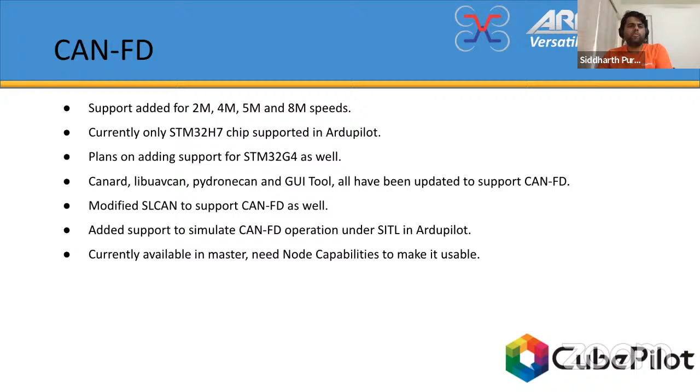So BRS basically means bitrate switching, which allows CAN-FD frames to be transmitted with two bit rates. So basically your arbitration phase will be transmitted at say 1 megabit, and the data phase can be transmitted at 8 megabit.

So what that allows is for nodes, and there are actually some chips in the market as well that are not able to do CAN FD frames, but are capable of understanding that it is a CAN FD frame and generate a blank data phase, so that the normal CAN node doesn't go into an error state. So this basically allows for a very nice movement from CAN to CAN FD.

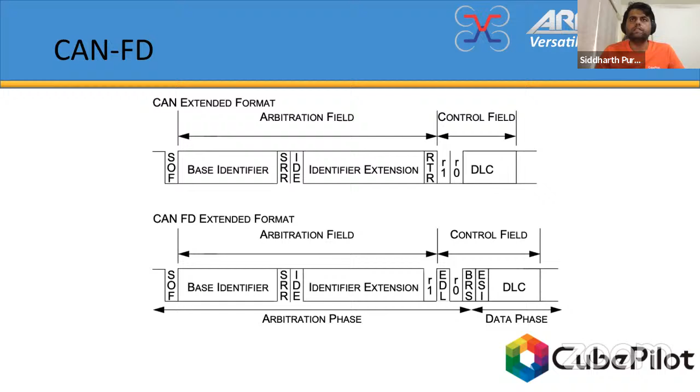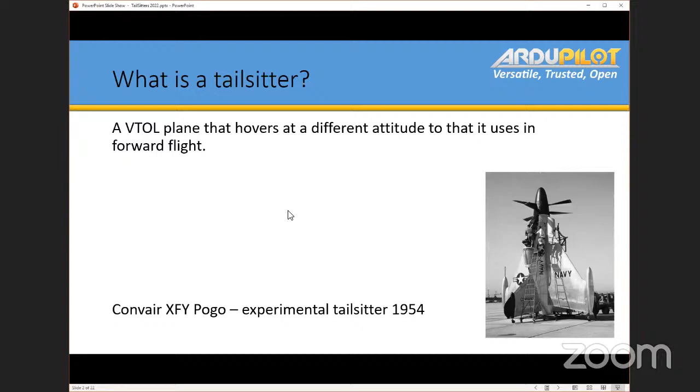Of course, we do also support single motor. So this will be like a 3D aircraft. So you can prop hang. ArduPilot can also prop hang with 3D aircraft. You need massive control surfaces because the control surfaces are your only form of control here. So you've got roll, pitch, and yaw just from control surfaces on these aircraft.

And we've got vectored tail sitters. So you don't need the massive control surfaces anymore because you generate your pitch and yaw forces by vectoring the motors. And of course, roll is still by differential thrust. And then we support these so-called copter tail sitters. That's basically a copter with a wing. So we get roll, pitch, and yaw from differential thrust and differential torque, just like a copter would.

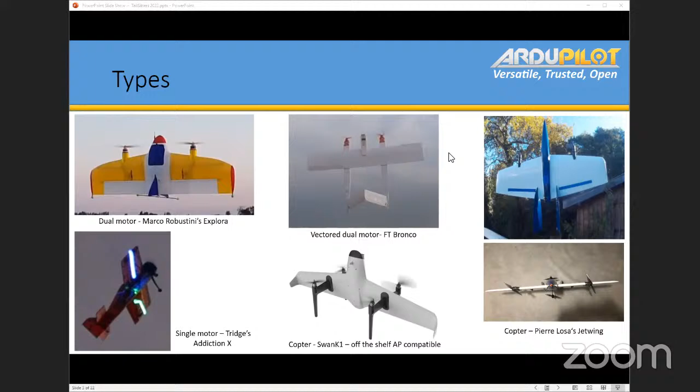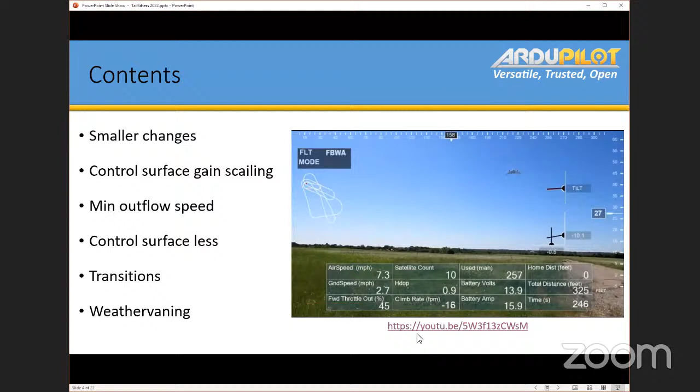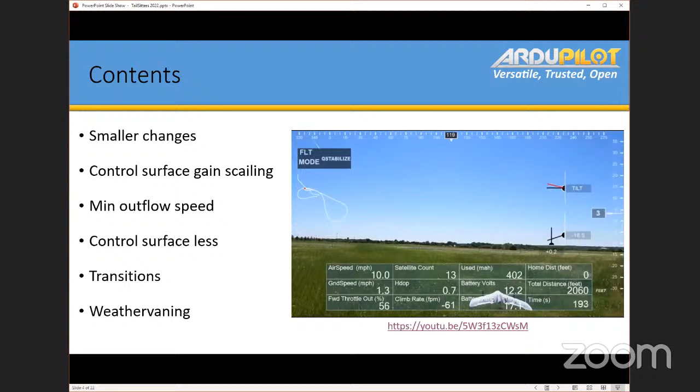So a little demo video of the various tail sitters to watch as we discuss what this talk's going to be. So that's a tail sitter there that didn't take off on its tail. So that's a thrust vectored tail sitter. These are all Henry's various vehicles. Off it goes there. So first of all, I'll cover some of the smaller little bitty changes that we've done. Then we'll have a look at the control surface gain scaling methods, the new minimum outflow parameters.

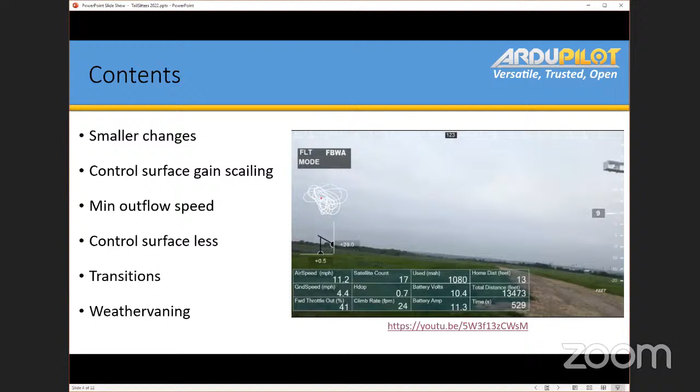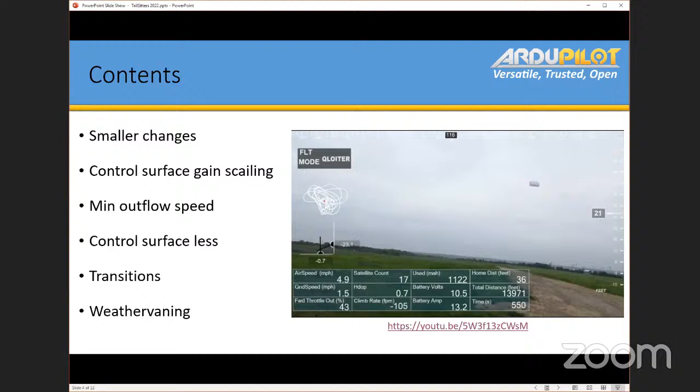It's one of these copter tail sitters there. Just popped up. Then we'll talk a little bit about control surfaceless tail sitters. There's quite a lot of interest in those, it seems. We'll cover transitions briefly and have a look at some logs of transitions, and then we'll talk about the new weather vaning functionality for tail sitters.

It's a thrust vector tail sitter, again, one that doesn't take off on its tail, and that's the SwanK1 there. So I think Henry's got one of every different sort of tail sitter in his box of toys. And I think that's the last variation.

So these are the smaller changes, little fix-ups that are not massive changes you would notice, but little itty-bitty stuff that got fixed in the background. So first of all, the big change if you're setting up a tail sitter on 4.2 is that we've now got this Q_TAILSIT_ENABLE parameter. So importantly, if you don't care about tail sitters, it hides all the parameters, so you don't have to see all these tail sit parameters that you don't need. So that's useful. And we've also done the same for tilt rotors. So it means us tail sitter users don't have to see all the tilt rotor parameters.

And it removes, in 4.1 we had some weird combinations, like you had to set Q_FRAME_CLASS to tail sitter, or you could set Q_FRAME_CLASS to something else, and then you had to set Q_TAILSIT_MOTMX. So there were weird combinations of these two parameters that enabled tail sitters or not. So the key thing here, if you've got Q_TAILSIT_ENABLE, you're a tail sitter, and you can use whatever frame class you like. So that's a nice improvement. I think it makes it very clear if you're a tail sitter or not.

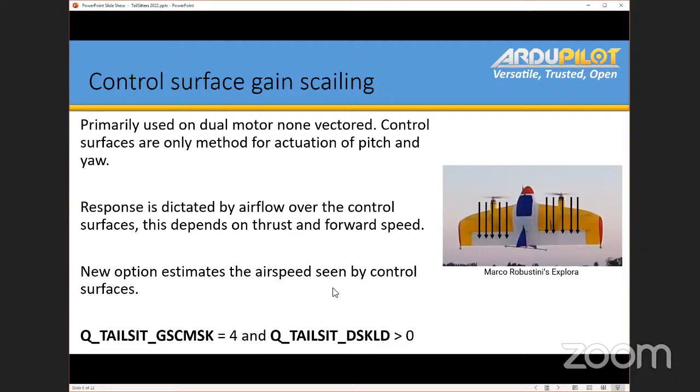So there's been a lack of equations in this conference so far, I thought. So I'm trying to make up for lost time here. So a few equations, I'm afraid.

So this is the actuator disk theory, it's called, and it's derived from Bernoulli's equation. There's a link there if you want to see how it's derived. So it's just a control volume here, and you'll intuitively understand this. If you hold your hand above a propeller, you don't really feel the air getting sucked in. But if you put your hand behind the propeller, there's this huge tube of airflow. And you can definitely see this on copters.

If you're hovering over grass, you can see a strong tube of air. So this is disk theory. And then this is the equation. So we've got thrust is air density, the area of your disk, the exit velocity, which is the velocity at the end of our control volume, minus the inflow velocity at the top, and just divided by 2.

So we've got these 2 stream tubes here. It's drawn as 2, but in actuality, we just do 1, and you add up all your propellers as if they were 1. So if you had 2 props, it would just be 1. It does the math once for a bigger propeller of equivalent area. So that's our stream tube there, and that's our equation derived from Bernoulli.

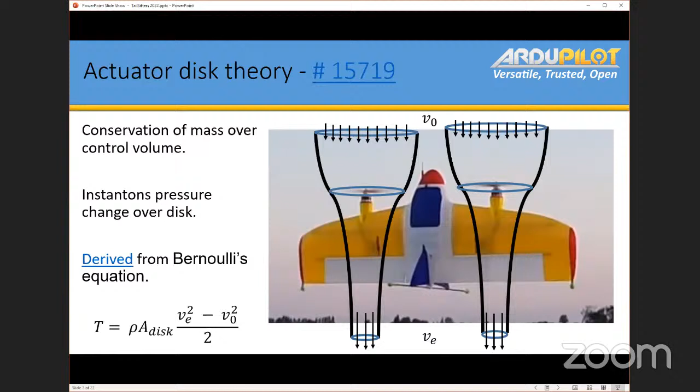So then we rearrange that to give exit velocity. The thing we want is this exit velocity, because that's the velocity acting on the control surface. So if we can work out that velocity, we can scale the control surface so that the response is the same, no matter what the throttle level is and how fast we're going. So we rearrange to give that exit velocity here.

So just rearrange the equation, and obviously we don't actually know what thrust is. But we do know what our current throttle is, and we do know what the hover throttle is. So we say that

I think Peter got muted. I've lost audio from Pete. He's muted. Can you hear me now? Oh, there you go. Back again. Yeah, you muted all of a sudden, Pete. Weird. Right. I don't know where I got to. Too many equations, that's what did it. Yeah. Point 3. Point 3.

Okay. So we say throttle is linear. We've got our thrust expo, so everyone's gone and set that properly. So we've got this linear throttle relationship, so that we say our thrust is equivalent to our throttle over hover throttle times the mass of the vehicle. So we know that at hover throttle, the thrust equals the mass of the vehicle.

Otherwise, you'd be climbing up or descending. So we substitute that in for thrust here, and then that gives us our equation for outflow speed. And then we have this cunning realization. We've got an M here and an area here, so that's actually disk loading: mass over disk area. So that is our new parameter, Q_TAILSIT_DSKLD. That accounts for both the vehicle mass and the size of your propellers.

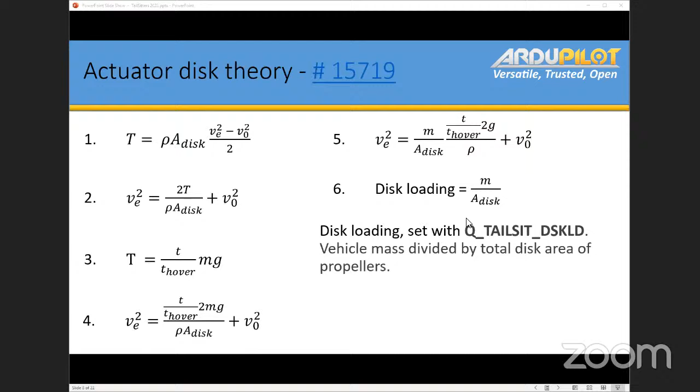So then we have to normalize by hover throttle, right? So that in the hover case, you always have a gain of 1, so that you can go and change all the parameters and it still remains the same for hover. It also means that if you turn on this gain, you get a gain of 1 in hover. We don't start off with some massive gain and you have to go and change all your PIDs. So in the hover case, we know that throttle over throttle hover is 1, and we have 0 inflow velocity in the hover. And in the general case, the inflow velocity is from an airspeed sensor if you have one, and if you don't have one, we use synthetic airspeed.

So then this is our final scaling. This big long equation gives us the ratio of the exit velocity to hover. So we always have a scaling of 1 in hover. You can go and change your disk loading and stuff, and it will always be 1 at hover. And that is true for all the scaling methods. So you can also just change to a different scaling method, and the scaling will always be 1 at hover. So you don't have to change your gains if you change the scaling. It'll always be the same in hover.

And then we constrain the scaling, so we've got a minimum and a maximum. So you don't get a divide by 0 and your scaling shoots off to infinity and the control surfaces can't keep up. So you can go and set this if you need to, so it doesn't saturate your control surface and shoot off to infinity.

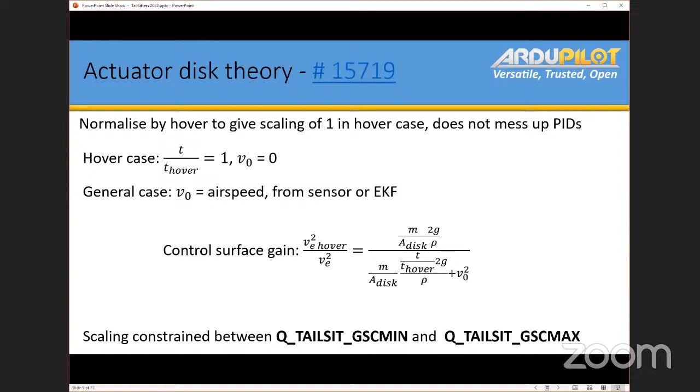So that is this sort of disk theory gain scaling, which does seem to show quite a nice improvement. But I would only bother setting up if you're one of these tail sitters that relies on the control surfaces, so you've got enormous control surfaces. It's not worth it for copter tail sitters - it will work, but you probably won't see much benefit because your control surfaces are sized for forward flight. They're not big enough that it would make a massive difference in that case.

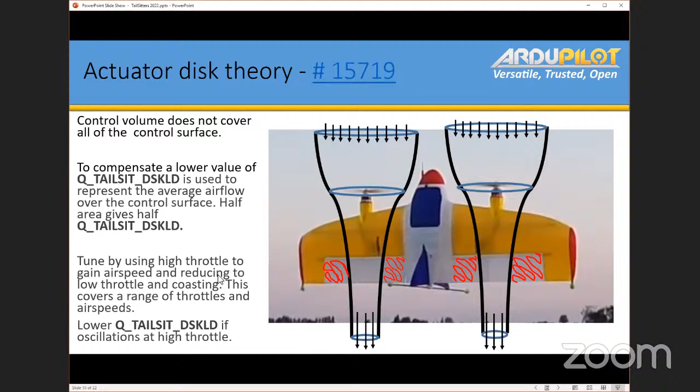So then we've got our disk theory stuff. Actually, there's a little extension we can make to this disk theory calculation - we can specify a minimum outflow speed. So we can say, I need at least this much airspeed over my control surfaces to maintain control, so then we increase the throttle such that you always have that much airspeed. In 4.1, often people would set a bit of a higher spin min so their propeller would never go slow enough that you lost this nice airspeed over your control surfaces. So that does work, although setting high spin min has other problems, like you mess up your expo and stuff like that.

But using our new disk theory equations, it allows us to benefit from having super low throttle. So if you've built up some airspeed, you can chop to a very low throttle, and if you're hovering, you have a bit of a higher throttle limit. It also means you can potentially descend a bit better because it's a limit at the motors level. People often have to set quite a low descent rate on their tail sitters because you're trying to fly a plane backwards. So you have to set a really low descent rate, which works, but then if you get a gust of wind that pushes you up, the vehicle tries to catch up with the descent rate, and it descends a bit too fast, and you're trying to fly a plane backwards.

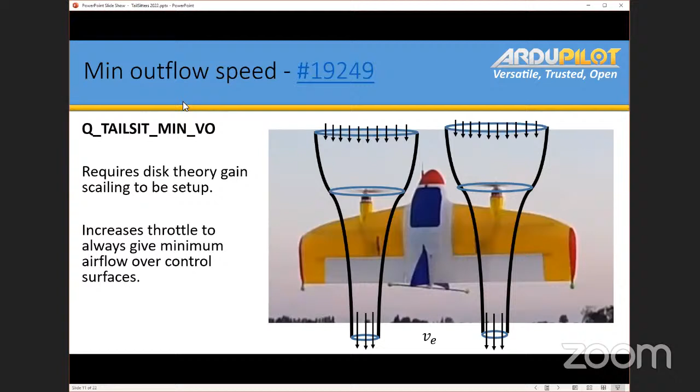It doesn't work. So we can use our same equations to derive a throttle level that will maintain at least the airflow specified over the control surfaces. So the param is Q_TAILSIT_MIN_VO, so tail sitter minimum outflow velocity.

Obviously, the airspeed sensor doesn't work if you're trying to descend, right? The airspeed sensor doesn't read negative airspeed. So if you're descending, if the airspeed is 0, we use the body frame X velocity. So we sort of have to guess the airspeed since you can't measure backwards airspeed, and that gives us this minimum throttle level. And then we apply that to the motor's back end.

So you do have to be careful. If you set this too high, the minimum throttle will be above hover and it will just climb. So you can make your vehicle fly away if you set this too high. So sneak up on it carefully.

And the other thing to watch out for is that it's limited by our throttle mix parameters. So you might need to set a higher throttle mix to allow the motors library to boost up the throttle. So these throttle mix parameters, there's a min for landing, I think. There's a maximum for auto throttle modes, and there's a manual for manual throttle modes. So you might have to increase those a bit, which allows the motors library to bump up the throttle for more than it's being asked for.

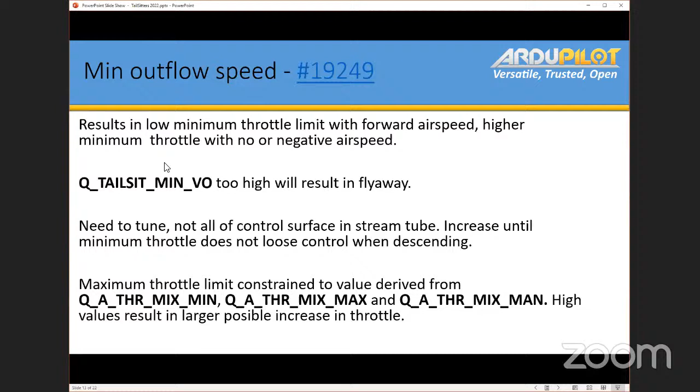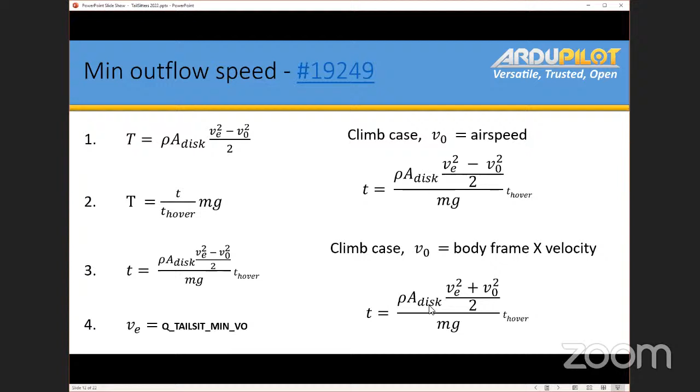So you do have to have set up the disk loading stuff. You need to be using the disk loading gain scaling. You can see we've got our disk loading term in here again, disk over m. So that covers that stuff.

So then control surfaceless. We get lots of interest on the forum. People want to set up control surfaceless vehicles. I do think it's a bad idea. You'll find that as you gain airspeed, your prop effectiveness decreases. So your props make less and less thrust, and the aerodynamic forces increase, which basically means your vehicle has a speed limit. If you fly too fast, you lose control.

So we do support it though, but control surfaces are very nice. They're a lot of fun to fly, but yeah, you can get some very interesting crashes.

So there's a magic Q_TAILSIT_ENABLE equals 2. That's the sort of thing you need to set if you haven't got any control surfaces. This enables active stabilization in forward flight from the motors, and it also forces what we'd call air mode if it was a VTOL mode. So it forces air mode, meaning if you go to 0 throttle, stabilization remains active. So you need stabilization all the time to keep your attitude control. It forces this air mode in forward flight.

Otherwise you find when you're doing an RTL or something and it tries to descend, it'll go to 0 throttle and lose attitude control. So we force on this air mode that keeps the stabilization always active, and it does work very well. You can fly around at high alpha and do all sorts of things that normal planes couldn't do. You just have to be a bit careful not to go too fast and lose control.

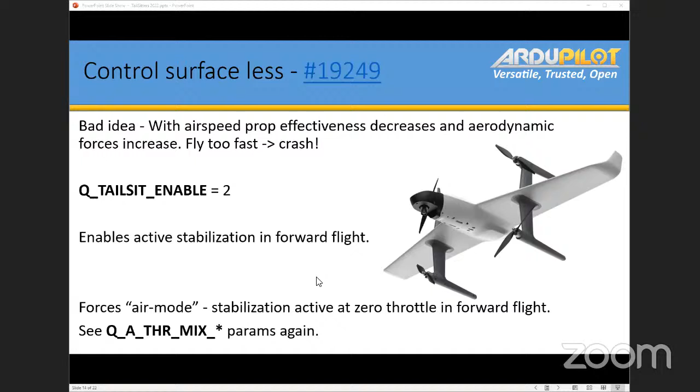Right, so we also support control surfaces and motors - you don't have to jump to this control-surfaceless aircraft. So this is Henry's box kite. We saw this flying in his little demo video at the beginning.

So in this case, you actually end up with sort of two ways of controlling the same thing. So we can yaw with differential torque on the motors, or you could use your elevons, and we could pitch by differential thrust, or you can use your elevons. So we actually have just introduced some new parameters for this, so you can actually scale up how much the control surfaces move relative to the motors.

So particularly in yaw, you might find that the motors are working really hard to yaw the vehicle with differential torque, and your control surfaces are not really moving at all. So to sort of fix that, you might want to halve your gain, so the motors work half as hard, and then you would set your scaling P here to 2. So to make the motors respond less, you reduce your gains, and then you make your control surfaces respond more by increasing these P gains.

And it's just one number, and it's a bit weird on these vehicles where you start to have multiple actuators for each axis. There's sort of two methods to actuate the same thing, and you have to weigh up how hard you want to try with each actuator. And this is the sort of thing you could spend ages messing with. But in general, you want to make best use of your control surfaces, particularly where your motors really have a hard time yawing the vehicle.

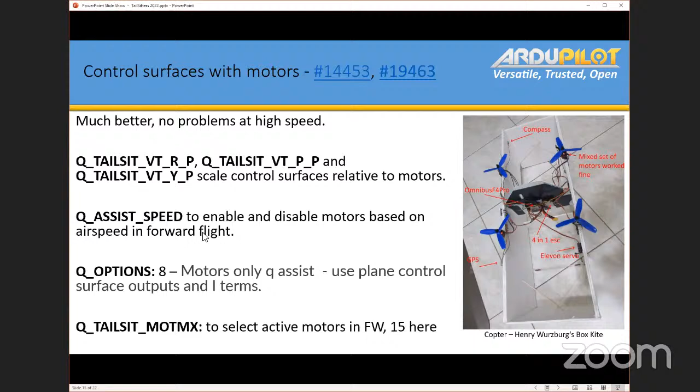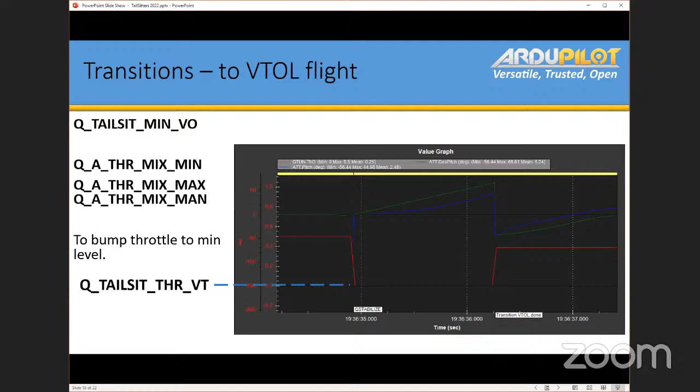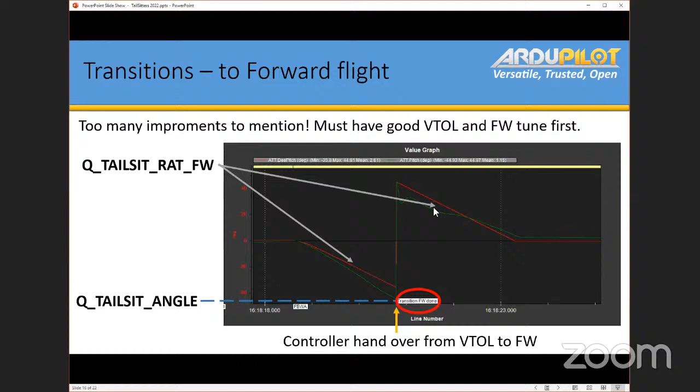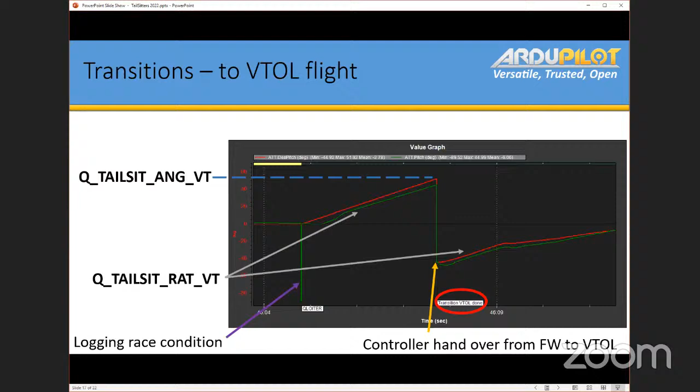And I really like, even on ordinary quad planes, having the weather vaning option to not weather vane on takeoff. That's really important. So I know I point the plane in the right direction, I know it's going to transition in that direction and not head into a tree when the wind's a crosswind. And I often take off quite close to trees because I like standing under the shade. So that's been a really useful option for me.

Peter, a quick question, can I? Sure. When you say that you're weather vaning, do you plan to have any kind of detection of the best facing the wind, so that it drifts the least? So doing a 360 rotation and see where it drifts more or less?